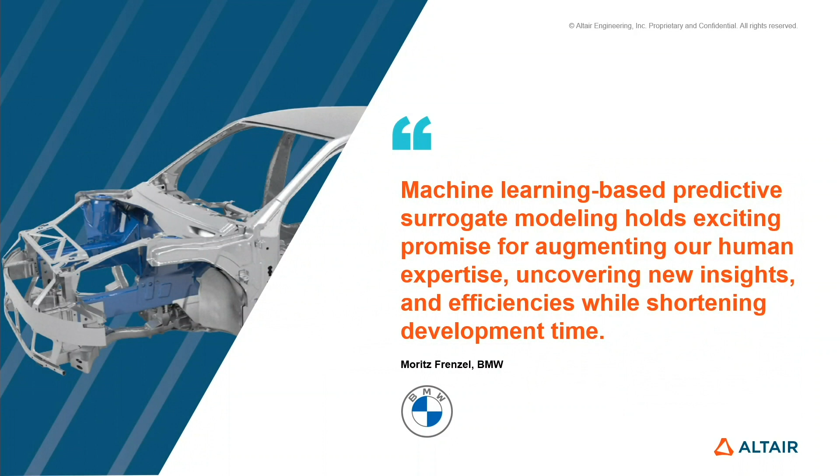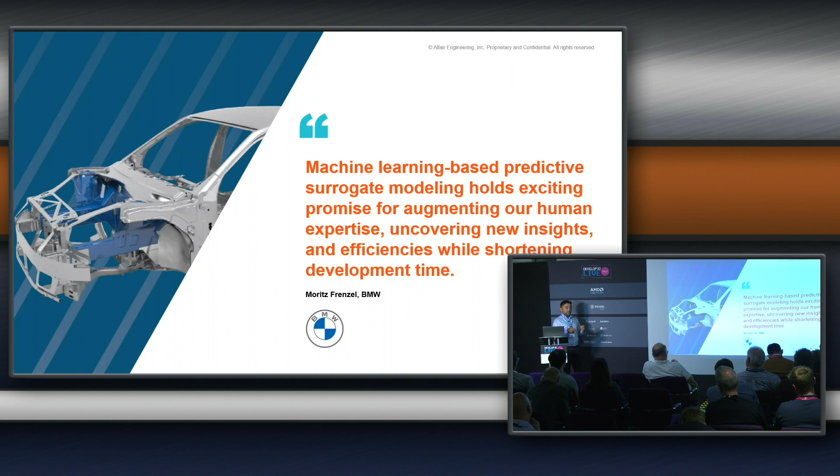The first one being BMW. So BMW using machine-based learning, so something that we've developed called clustering. So clustering the designs and allowing the customer to get to an optimum faster. So we'll see that in an example later on.

Jaguar Land Rover, using machine learning and text analytics to take warranty data and automatically bin it, so engineers can spend their time focused on the issues that the customer actually needs fixing.

Mabe is using data analytics to predict future failures in their products. I think we see more of our customers looking to leverage data, and it's such a powerful resource to have—getting access to it very quickly and at the right time. Speaking with one of our big automotive clients' engineering director, the thing he said was...

It's all about fueling the engineer. If you can fuel the engineer with the right data at the right time, it becomes a very powerful combination.

So how has this been achieved? Through 32 products developed in-house and 46 products through acquisition. I don't want to go through all of them, I just want to highlight a couple.

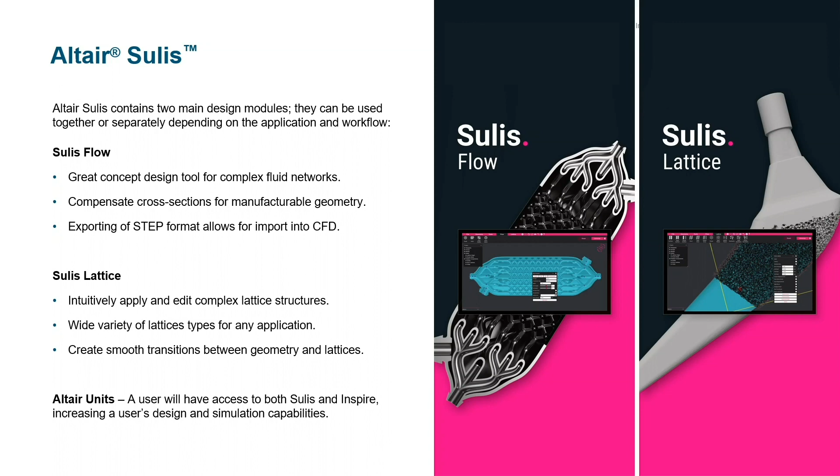Secondly, RapidMiner—a data analytics platform that was recently announced a couple of months back. It has over 1 million users worldwide taking data and trying to make better informed decisions using that data. We want to get these tools into the hands of the engineer and give them the tools to make better informed decisions with the products they're designing, because not in all cases is simulation required. It may be that the data is already there to help you make a better informed decision.

So why Altair? Just 6 points: best-in-class analytics and AI solutions, global domain simulation expertise—I'll give you a quick run-through of Altair's history in optimization in the next couple of slides—and leader in HPC technology and open architecture.

Anyone interested in learning more about our licensing model, which is unique and patented, can go take a look at altair.com/altair-units. Everything you see in terms of technology is all accessible under the one umbrella, and everything you'll see in my colleague Chris's workshop is already in the technology, ready to go—no additional features or licenses required.

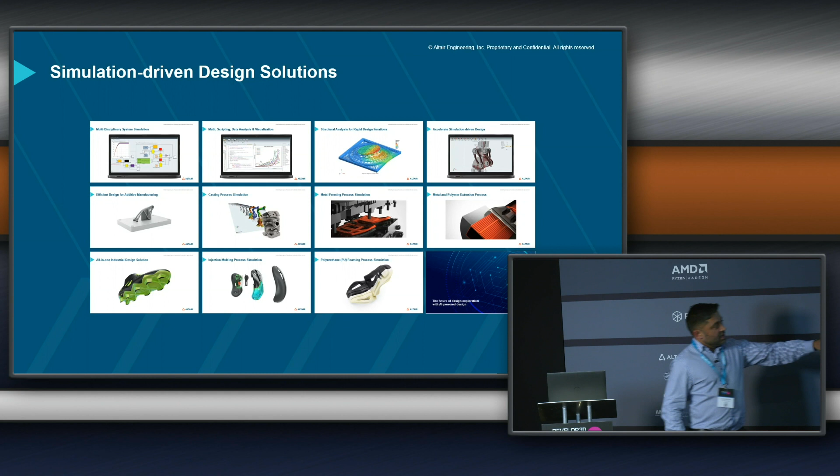So really, really fast—anyone doing CAD who just wants to see if their designs will work or not can bring their geometry into that solution, and it'll give you a result in minutes. You don't need a lengthy training course on how to do simulation. The tools in there cover printing, casting, injection molding, foaming, stamping, extrusion, all available under that Inspire tool, which I'm going to talk to you about more now.

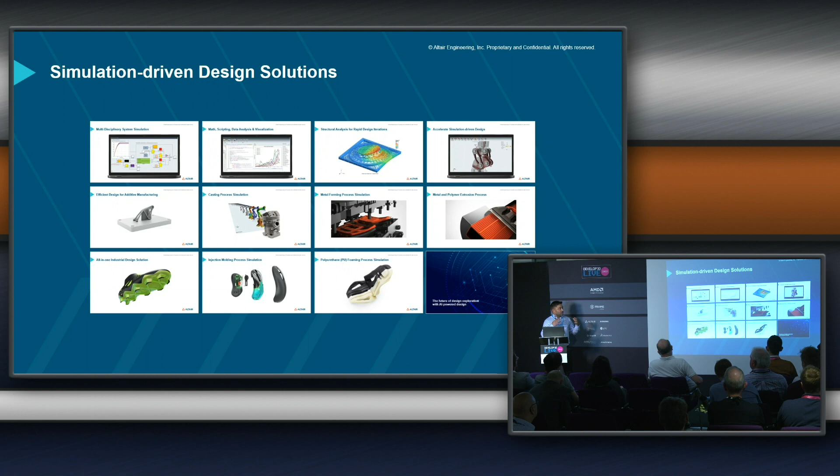So Inspire is what Chris is going to demonstrate next door, and all of these generative design tools I'm going to talk about now are all available within that platform.

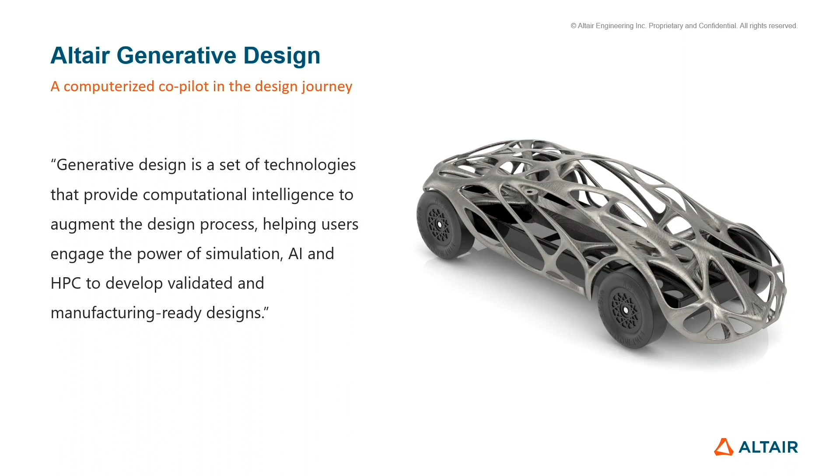So generative design, I think we heard one of the team present that from Dassault this morning. And for us, we see generative design as a collection of tools to allow engineers and designers to produce products ready for manufacture, bringing together simulation, HPC, and data - validated, ready to go products.

Now why is this so important? This is a bit of a snapshot through time of the evolution of simulation. Simulation was predominantly used back in the early 1980s to replace test, because test was really, really expensive. As you move along here, we saw more and more use of simulation, less reliance on test, and that's fine because you can reduce cost in your product development.

But one thing that wasn't being done with simulation and the advent of HPC was using simulation to actually impact your design and drive your design. So in the early 1990s, Altair developed a technology called OptiStruct, and gave OptiStruct to the CAE analysts at that time to start using simulation to impact the design.

So what you're trying to do now is use simulation to drive the CAD. Back in the early 2000s, it was probably predominantly gauge optimization, playing around with the gauges of your body in white and so on. Since then, we've developed a lot more solutions, badging those under the framework of generative design, which we'll see in a second, and then bringing in data.

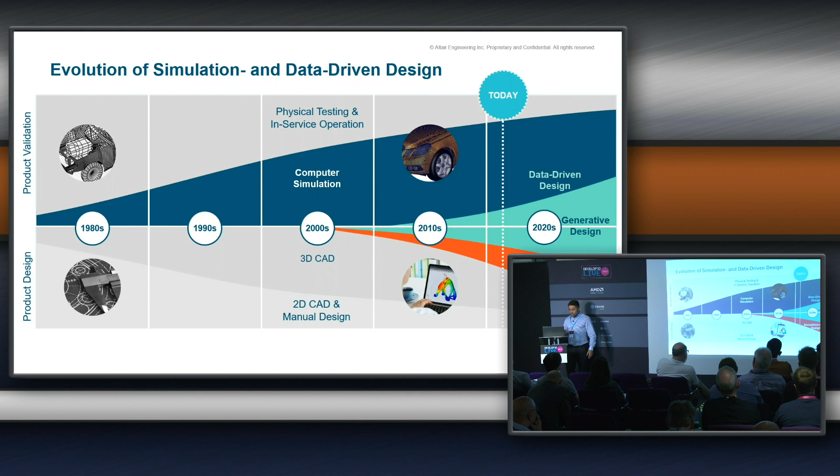They're all geared about getting your product developed significantly faster and making sure it is really, really robust and best for market. The key, I keep having to emphasize the term - the key is speed. You don't want simulation falling behind your design. You want simulation to be driving your design.

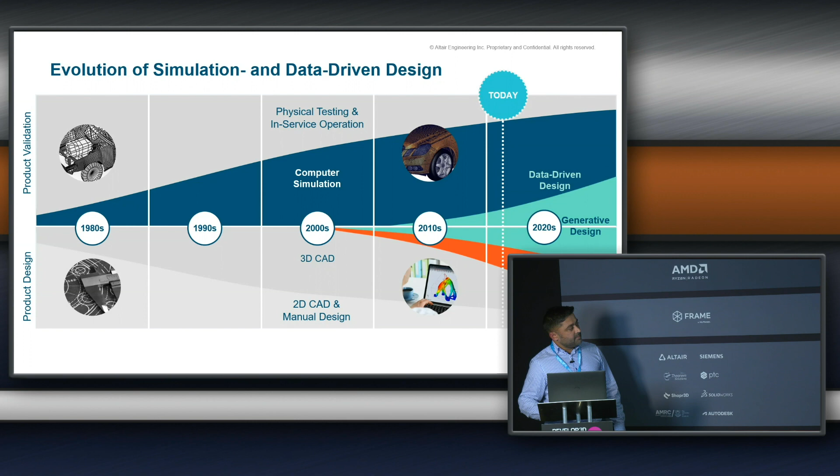So just that evolution - back to OptiStruct, back in 1990 when we launched OptiStruct, and again it was a really disruptive tool, because it was like Bradley showed you, coming up with really organic shapes that people were saying can't be made. And then we started introducing manufacturing constraints so they could be made.

Adding in more features, adding in composites, adding in lattices, CFD responses for your thermal, and then some of the technologies I'm going to talk about - shape, physics, and expert AI. And these are some of the brands that have been with us on that journey, and they're still using the technology today, which is fantastic.

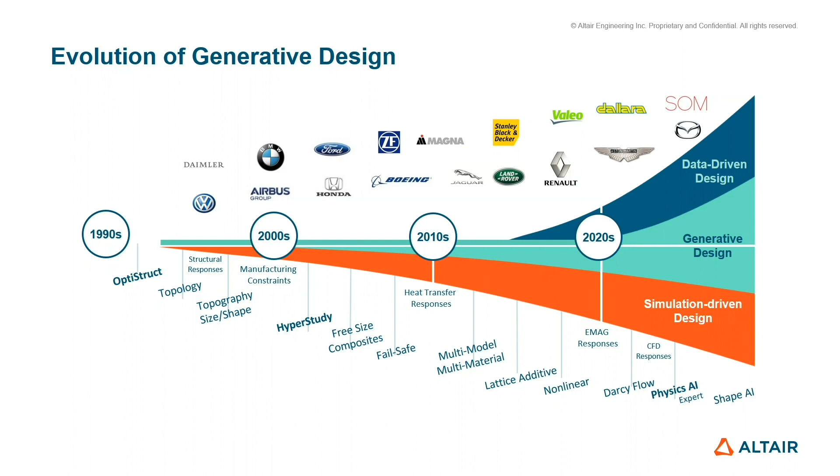So generative design, we see that as a framework of three areas. Number one, optimization, like you've seen already - whether it be topology optimization, where you're trying to take away as much material as possible, topography optimization, where you're trying to increase the stiffness of your part and your modal frequencies, and maybe size and shape, and there's a lot more in there.

Design exploration, so doing DOEs, looking at data, process automation. There may be several geometries or designs that may do the job that you need, and which one is the best one - and do you need to consider manufacturing in that process? We'll see an example there.

And finally, AI - so AI and data-driven design, data mining, predictive models, and machine learning. All of these three things will help you design a better product. So these little bubbles should still appear at the top.

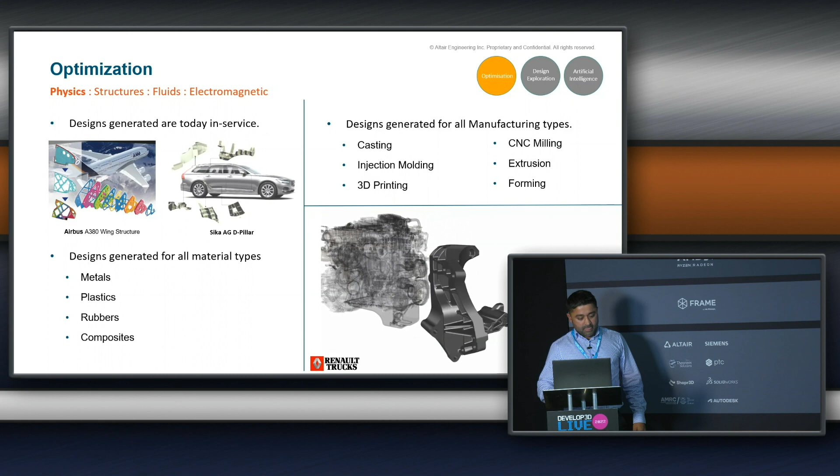So this is my only slide focused just on optimization, and this was work done back on the A380 wing ribs, which were designed using OptiStruct. Took out, I think, 3 tons in total out of the weight of the wings, optimizing metals, plastics, and rubbers, and some work done by Renault Trucks - which is old school engineering now, isn't it - an internal combustion engine, to take out 120 kilograms.

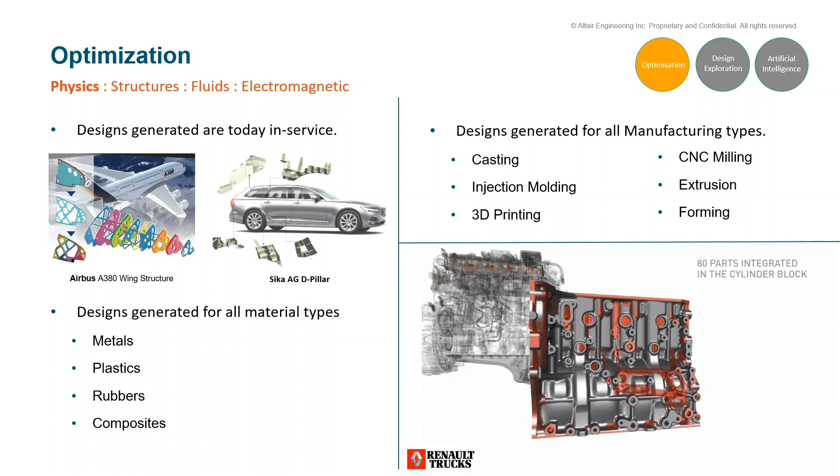And I think optimization injects innovation into your products, but ultimately you've got to be able to make these parts, and that's where a lot of these manufacturing constraints come into play, in terms of being able to make the part.

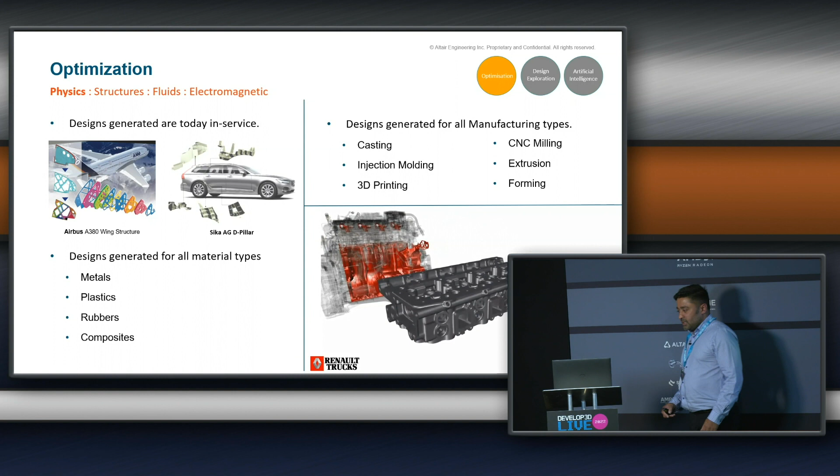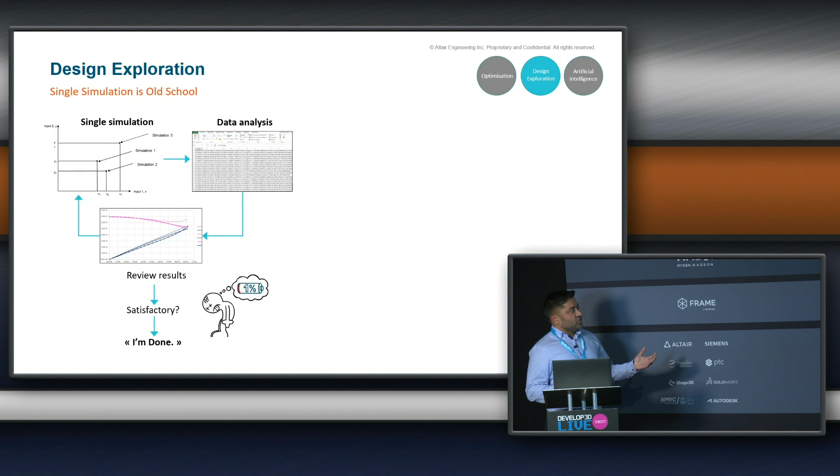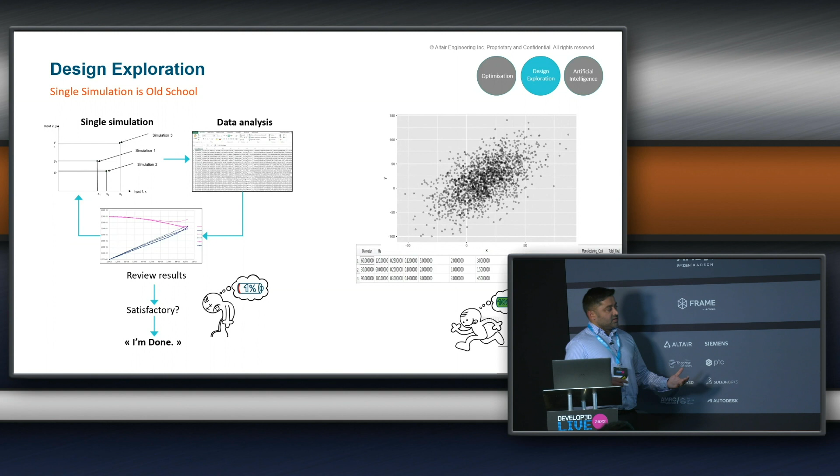Design exploration - I think I've been here whereby you do a simulation, look at some data, then review the results, and you may go again, and just keep going. I think one of the things you want to try to do, and now you can because the technology's there, the HPC's there, the licenses are there, is do design exploration. Why you want to do it is to see what parts of your design influence each other. It's such a powerful solution to see that complete space your design could sit in, and once you can see that, you can start looking at optimization. This sits before the optimization piece where you're just trying to explore your design. Again, this is all single solver, single physics, multi-physics enabled.

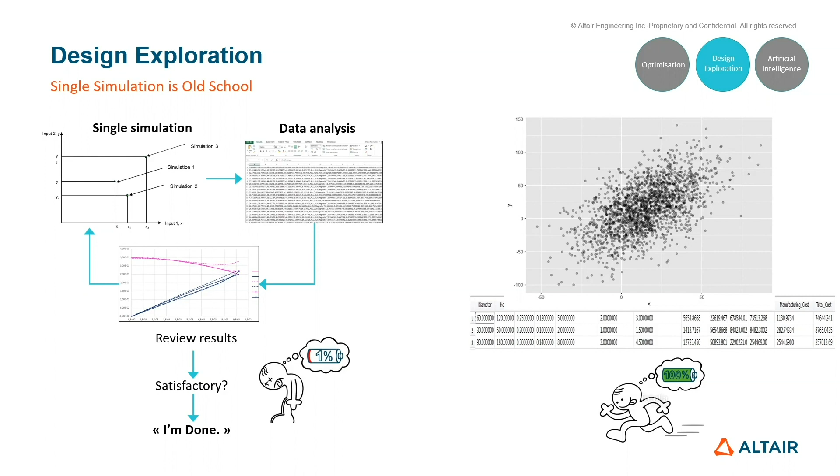So what could you potentially get out of that? From your design experiments, from historical data sat within your organization, you can start doing machine learning. You can start doing scalar predictions, looking at key performance indicators. You can start doing field predictions, curve predictions, and the BMW use case was using design clustering.

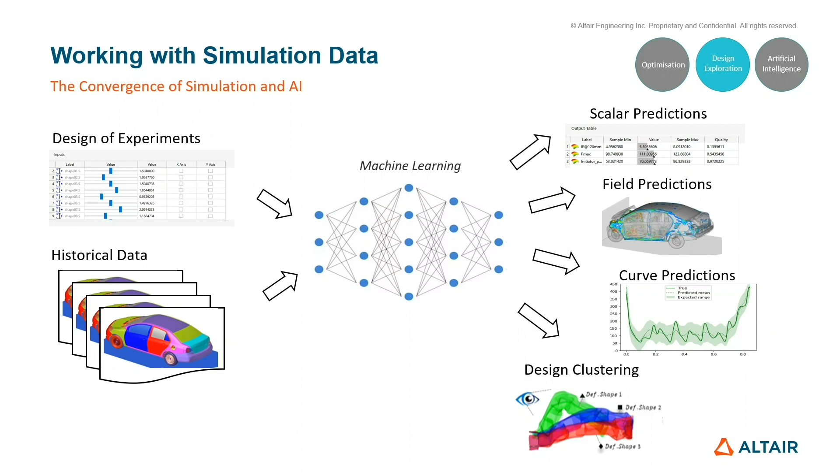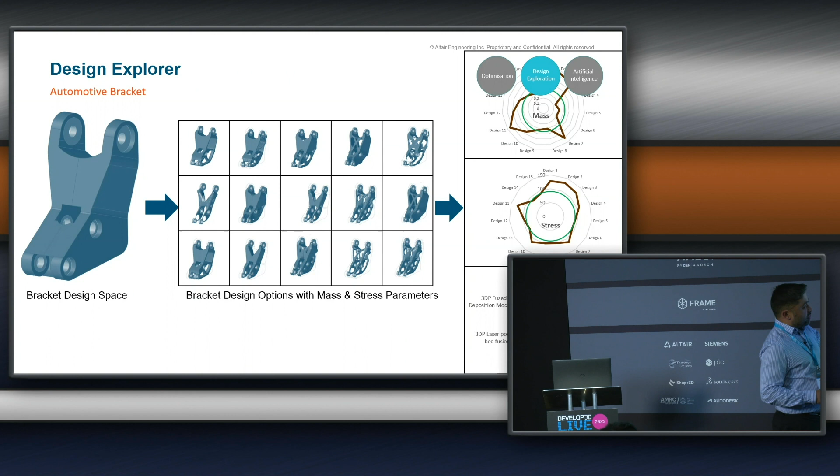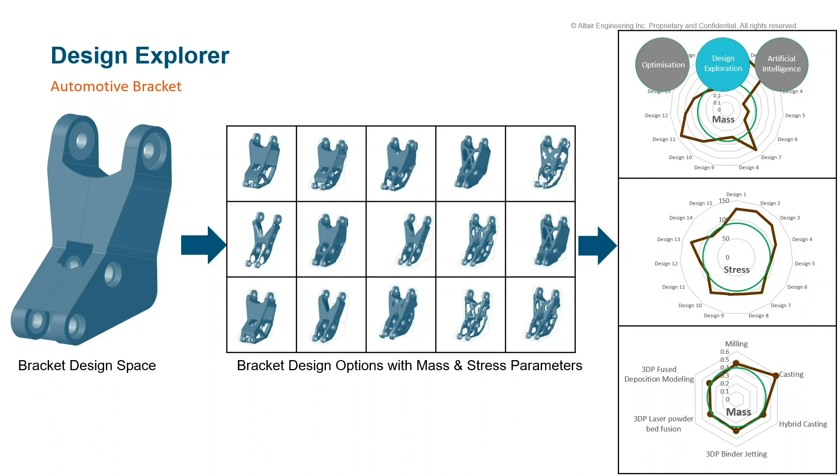So here's an example of some design exploration - another simple bracket and the various designs that could be produced by the technology, and then the different stress contours based on the design. I think the power of that Inspire suite is that not only can it do this design exploration, you can start looking at the actual manufacturing process, taking it into consideration. So you've got hybrid casting, binder jet, desktop metal, traditional milling, traditional casting, and metal desktop printing. Ultimately you've got to be able to produce the part.

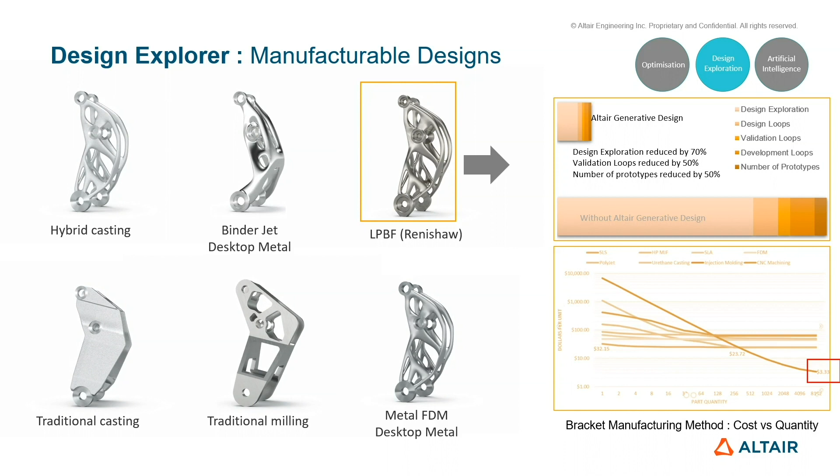I think being able to simulate that process as well, whether it be cast, sheet metal formed or printed, is what you ultimately need as a designer to be able to do, to confidently say that this geometry is going to work. And I think this just shows the process of that time saving that could be achieved.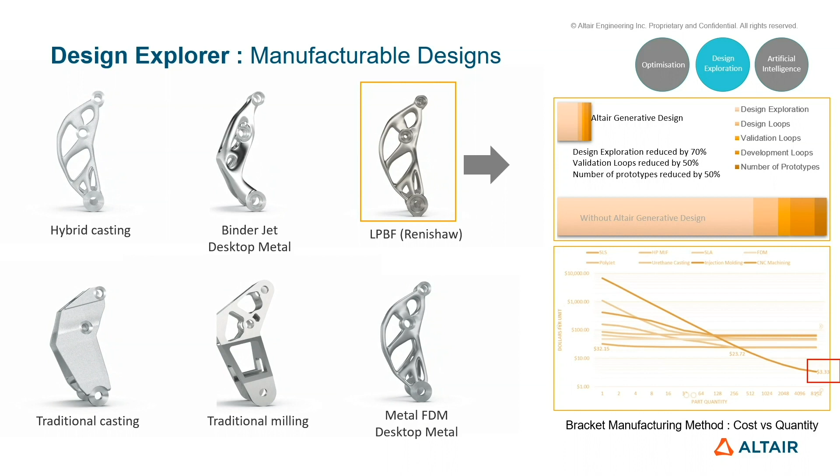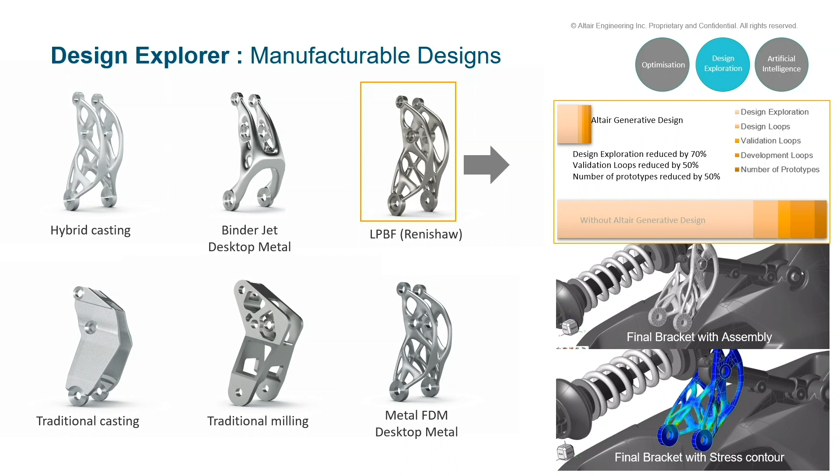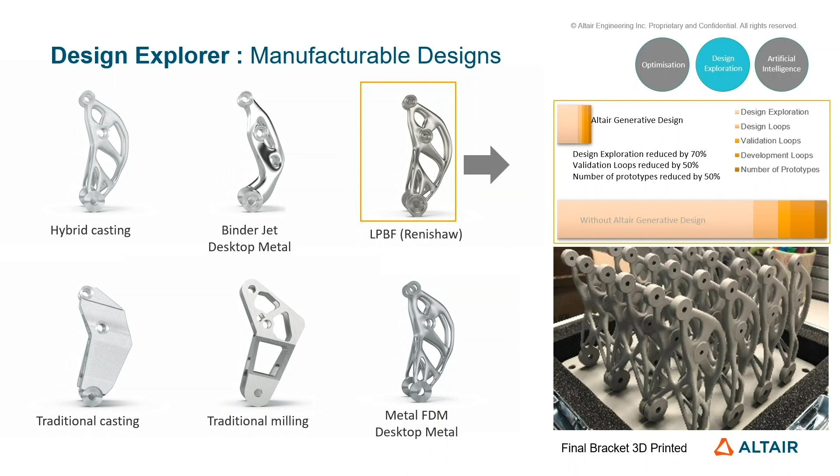So there's that final bracket that was produced. And then in the same solution, you can bring it in and actually do the dynamic simulation and see it in its real place in that geometry. And then obviously just find the final printed parts that were produced, I think, on a Renishaw machine.

And finally, the AI piece - artificial intelligence. I think we can break that up into physics AI, shape AI, and this expert AI, and I think this is where we feel the next evolution of the tools is. Again, these are all already available in the tool sets within the HyperWorks suite.

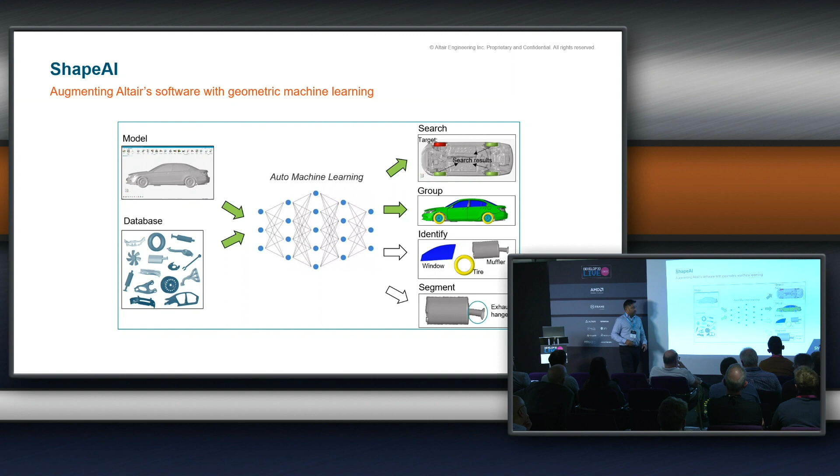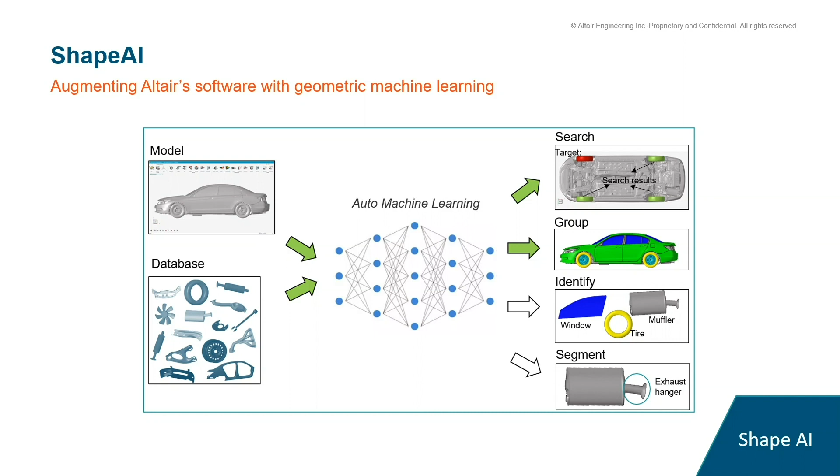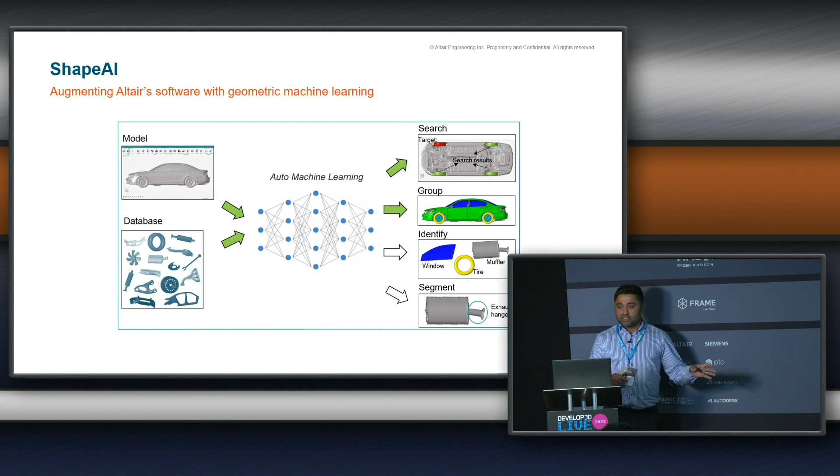So shape AI - again, if you're from a CAD environment, this is nothing new in terms of your model, your database, auto machine learning, doing searches to find similar parts, identify parts and so on. But I think the new part is that by finding those, maybe you could try to inject some innovation in there. I think the most recent use case was semiconductors, trying to find which semiconductors your vehicle's using, and could you get away with using different semiconductors in different areas, or use the same semiconductor in different areas. It's a very powerful tool that we've basically added to all our products, because everyone's bringing in geometry of similar nature.

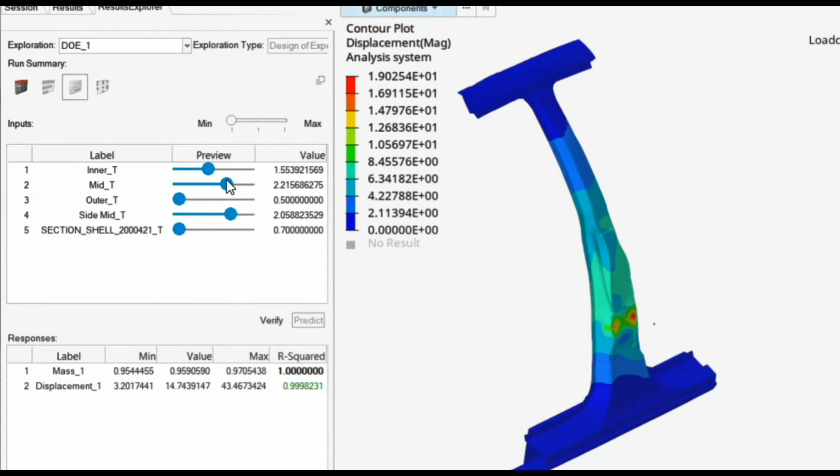So physics-based AI. In this example, what we've done is a design of experiments - a DOE on this B post, looking at intrusion on the B post, and we've come up with our response surface and brought it into Design Explorer. Now we've got these little dials that we can play around with, which can be seen here. So we could start playing around with the thicknesses of the parts, change the thickness and do a predict. That prediction is basically interpolating the results between those two designs to give you a new prediction.

I think the BAC presentation this morning talked about the importance of customizing your product for your customer. Wouldn't it be great once you've measured your customer up, that you can quickly generate a brand new design which is already fully validated, because it's already got the extremes of the response surface built into the use case. So this is basically a prediction - we've not run anything new here. There's no simulation been done, no new analysis. We're just interpolating the results from the two extremes based on these variables that we've injected.

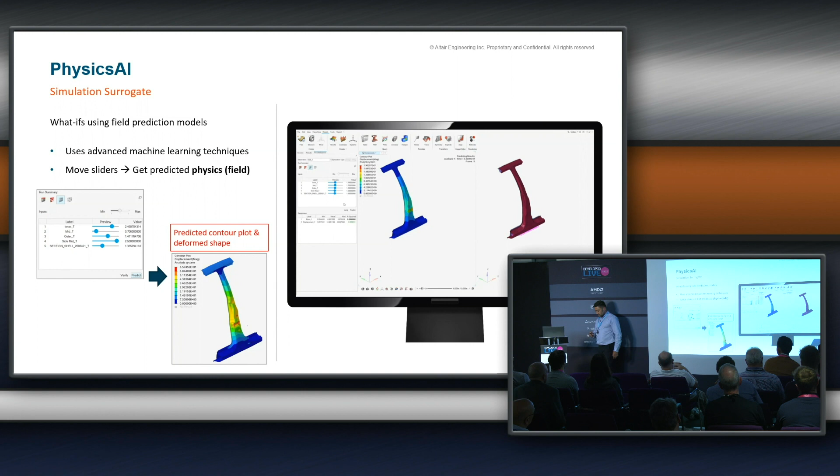So that's PhysicsAI. ExpertAI. This refers to the process where we've done our DOE, we've come up with some results, we've come up with our response surface, and then we can do an optimization.

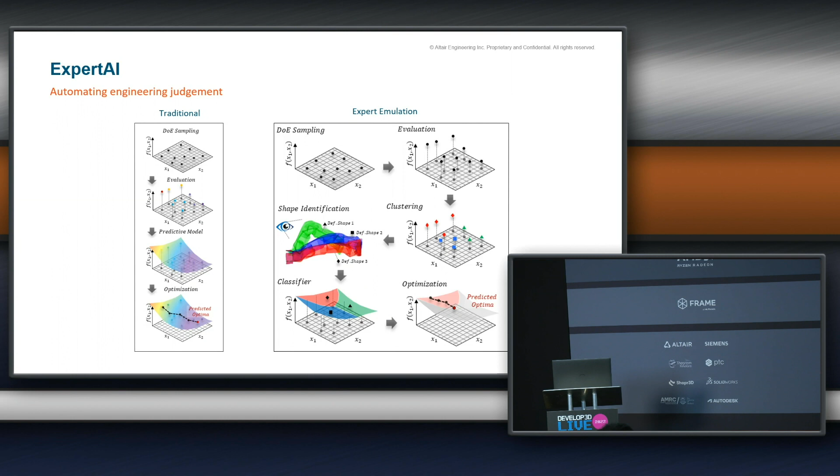This is a simulation of a front longitudinal. What we've tried to do here is look at modes of failure and have the engineer tell the ExpertAI that I want my mode of failure to be a particular shape. So we're now using machine learning to tell that solution what shape I want to see.

And what tends to happen is you've put 3 shapes in, your DOE response surface now looks like this. These are the different responses based on these shapes from your design. As an engineer, you may want this mode of failure because that's what you want to see based on your criteria or targets. Once you know that defined shape, you can get to your optimized product a lot earlier.

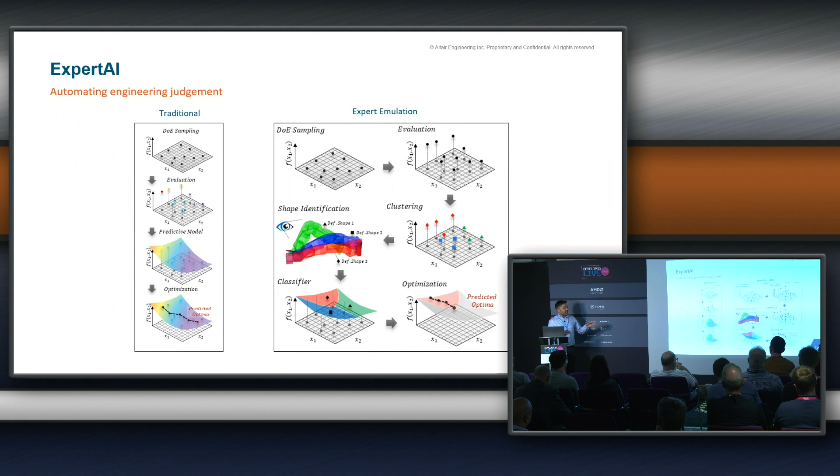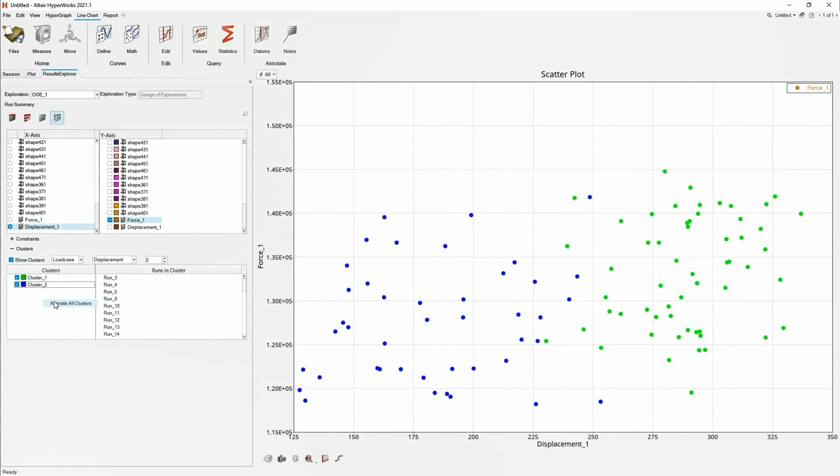That is essentially what BMW were able to achieve. They were able to engineer their product in a significantly short amount of time by using design clustering. This is that design clustering, whereby we've got our analysis set up. We've got various results coming out based on 2 or 3 design clusters, and then we're using these clusters based on an input we've put in, and you can see the different runs there.

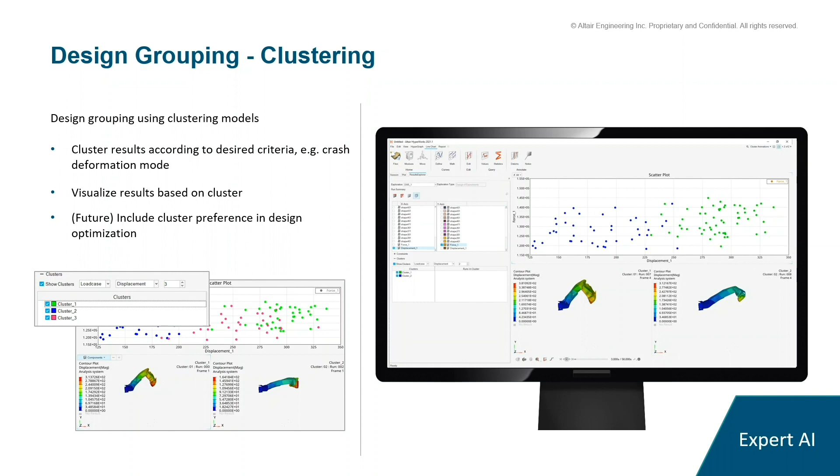This is a solution from the automotive industry, but other applications for this include antenna design, where you're trying to get a certain performance out of your antenna. So instead of giving a shape, you can give a result output that you want and allow the technology to come back to you with a fully designed antenna.

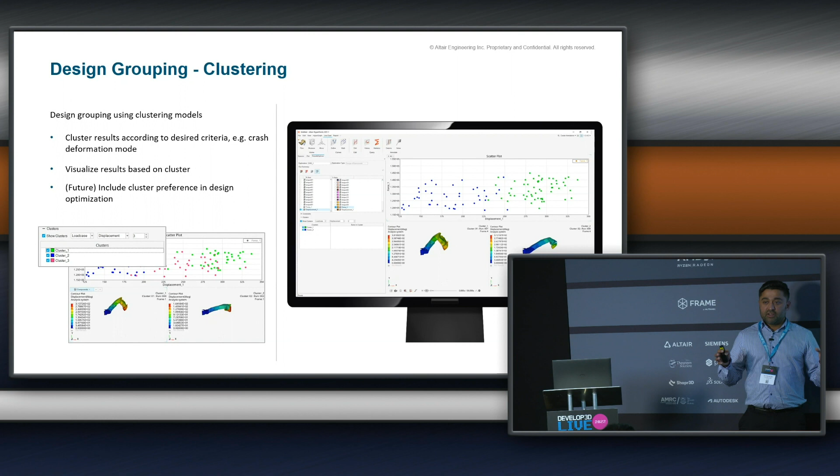Other areas include your manufacturing process, where you want thinning or certain properties in your pressed part in a certain area for other performance characteristics. Again, this process will tell you the optimum solution a lot faster because you're effectively giving it a head start.

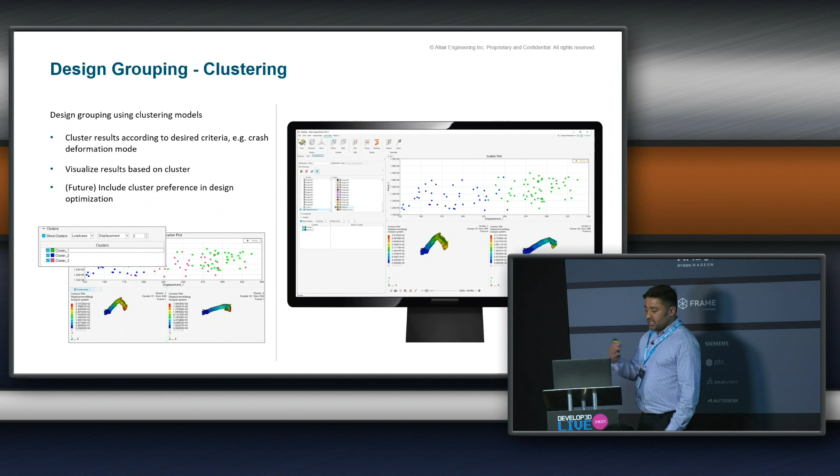So that's generative design, and I think we have that in those 3 areas: optimization, design exploration, and this AI piece, all built into that Inspire solution.

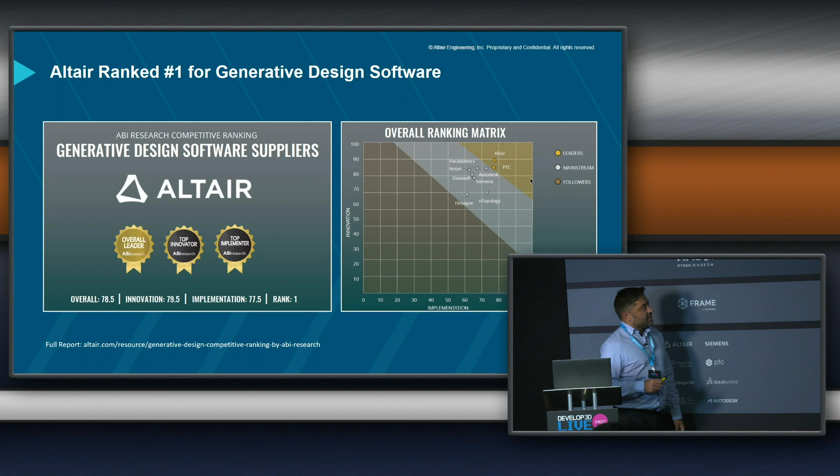One of the things we had our team in the US do, a third party ran a ranking by ABI Research in the US, ranking some of these technologies, and it was a testament that Altair came out top in that ranking for their generative design technology, because it is a complete solution. You can all see it live and try it for yourselves in the workshop.

We're actually starting now, so I better be quick.

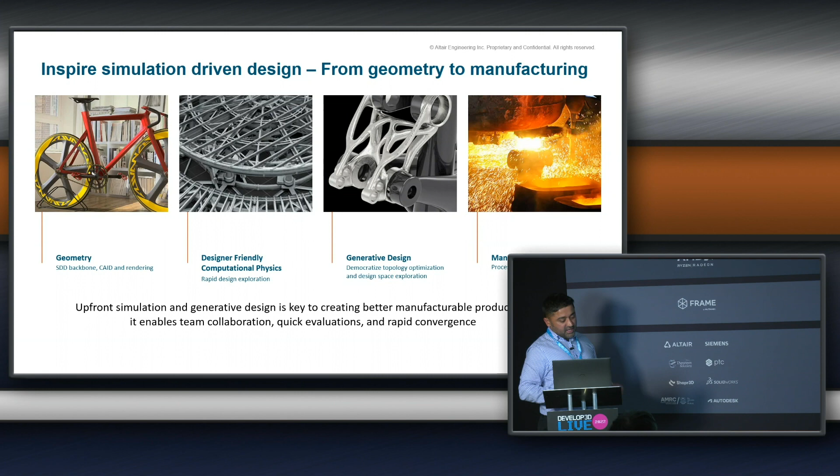So this is my final slide, and I just want to remind everyone about these things. I think the technology's backbone is being geometry based. It's designer friendly, and that's key, because designers need to be able to come back after a couple of weeks and use the same tool. Inspire is so intuitive that everybody should be able to use it.

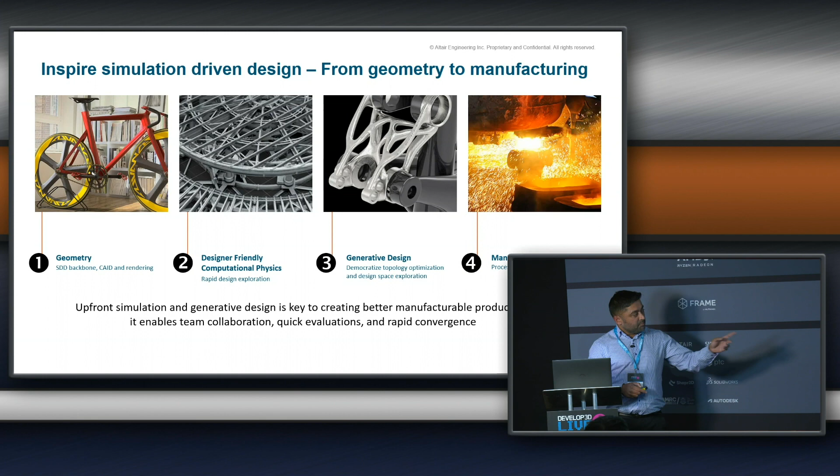Generative design brings in those three areas I mentioned: optimization, design exploration, and AI, all built into that solution. Finally, being able to confidently say that you can actually make the part based on your manufacturing process, and that's where the manufacturing part of it comes in.

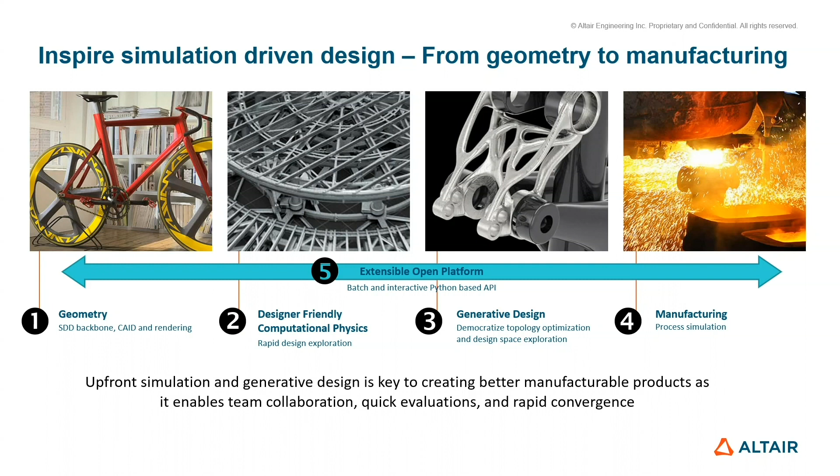So that's my final slide, and I just want to mention the extensible open architecture, which is the last piece on that. I want to thank everyone for listening, and I hope you found it useful.